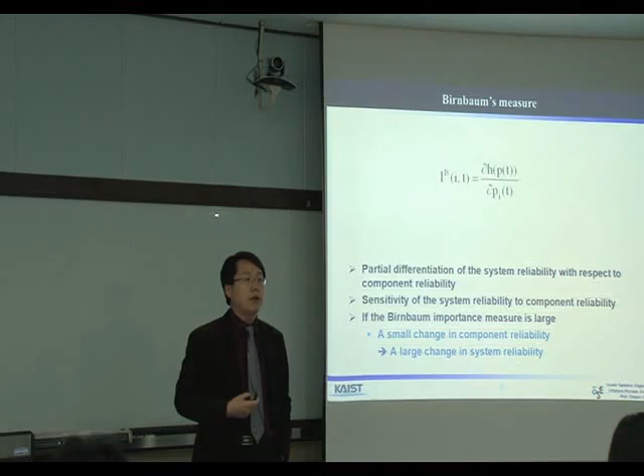The first naturally occurring measure is the Birnbaum measure. It's a partial derivative of the total system reliability with respect to the component reliability. An important conclusion of the Birnbaum measure is that the Birnbaum measure of component I is independent of the reliability of the component itself.

Assume that we are working in a systematic society. The Birnbaum measure tells us that if we wanted to improve our contribution to the society, we should improve the reliability of others, not mine. So it is useless to improve your reliability in order to increase your contribution to the society. Believe it or not, that's the implication of the Birnbaum measure.

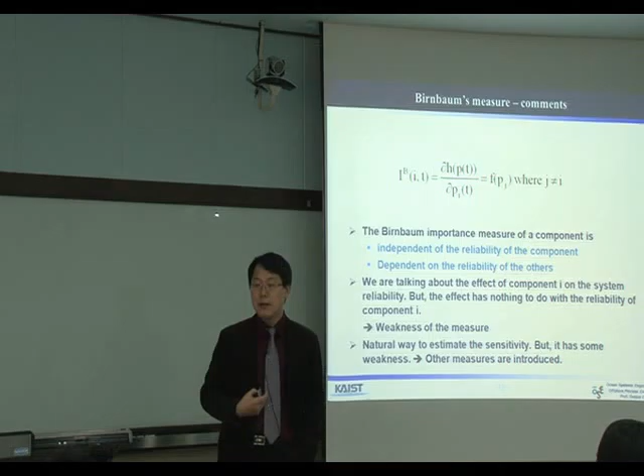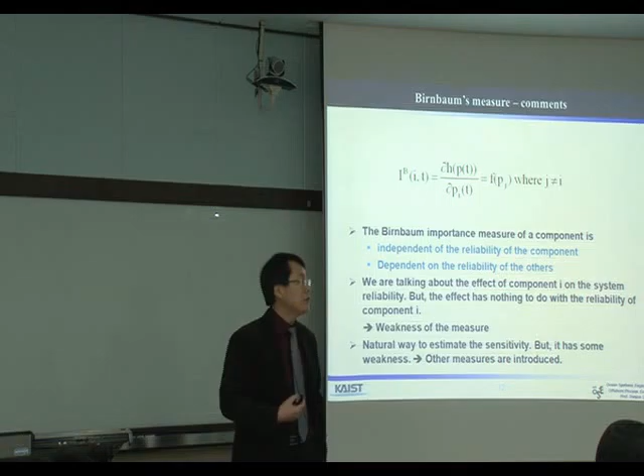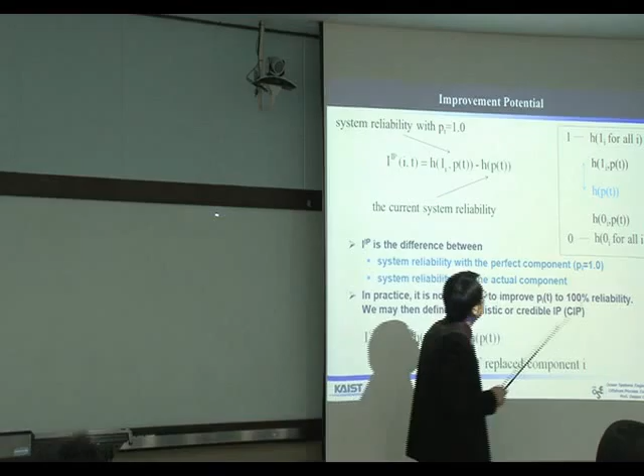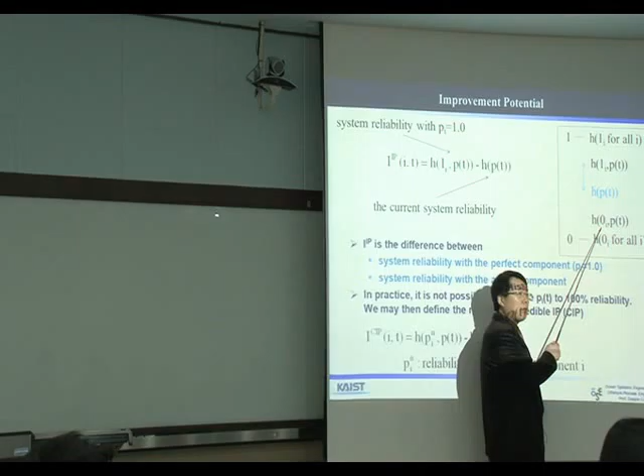Okay, so it seems, even though it is actually correct, that the Birnbaum measure is a little embarrassing, or looks unreasonable. So we introduce other measures. I added this figure. H is the system reliability. H(p(t)) is the current system reliability. H(0_i, p(t)) is the system reliability, assuming that the reliability of component I is 0.

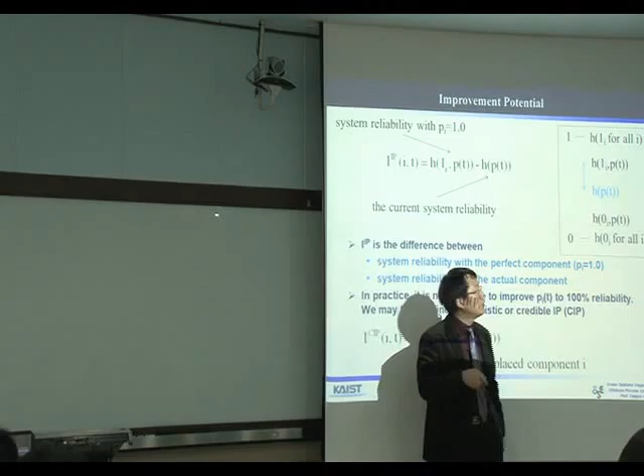Okay? The lowest level is, of course, the system reliability is 0 when all the components have 0 reliability. So this is the bottom. Because the reliability of all the components is 0, the system reliability should be 0. The maximum value of system reliability is, of course, 1. This can be achieved if and only if the reliability of all the components is 1. This is a kind of imaginary system. No system can have the reliability of 1 at any time. The reliability should decrease with time.

This is another kind of imaginary ideal system. The reliability of component I is 1. So this reliability should be greater than the real system reliability, because the reliability of component I is equal to 1. This reliability should be less than the current system reliability, because component I has 0 reliability. So this is the level of the system reliability depending on the component reliability.

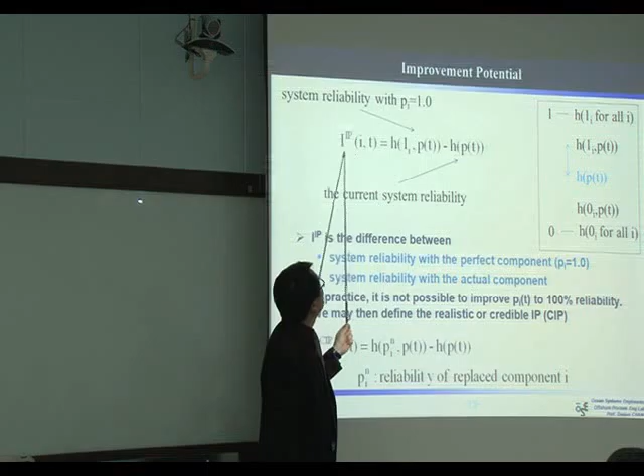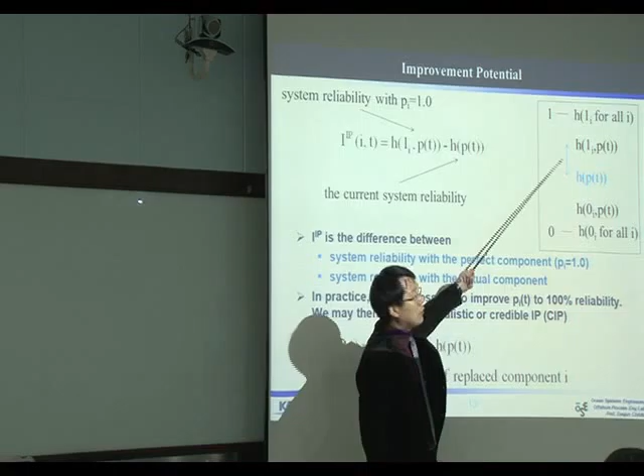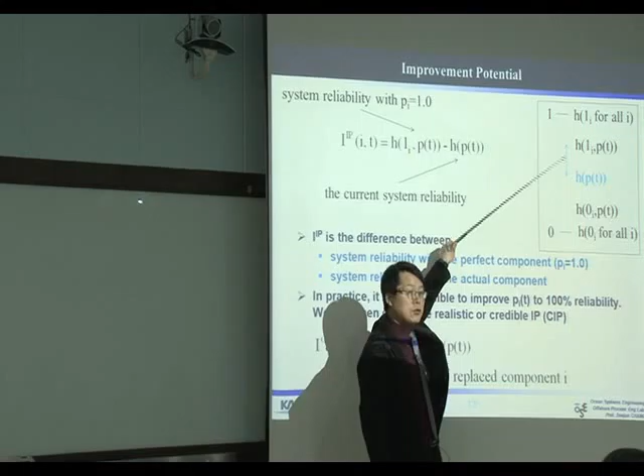Improvement potential is H(1_i, p(t)) minus H(p(t)). Mathematically it is confusing, but take a look at this figure. This is just the difference between two reliabilities. This is the ideal reliability, assuming that component I has reliability of 1. Component I is perfect. So now you can understand why it is called improvement potential. It is the potential by which the current system is improved if the current system has a component I which is perfect.

In practice, it is not possible to have a perfect component. Any component, any system has reliability that decreases with time. So sometimes we introduce a parameter for actually achievable reliability. So this is where p_i^n is the reliability of the replaced or improved component. Any question?

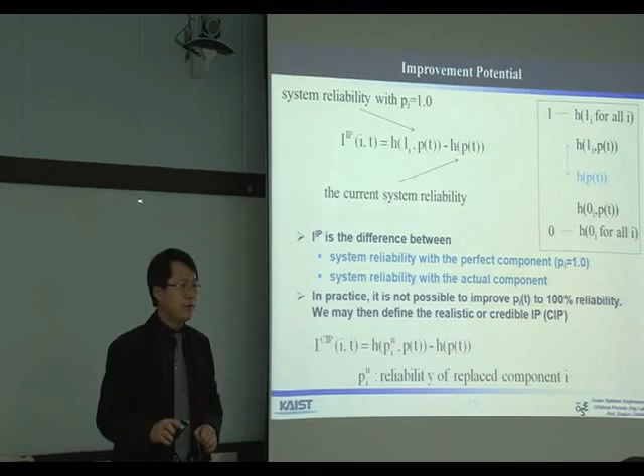Good. Second is about risk achievement. What is risk? Risk is frequency times consequence. In this case, risk is regarded as the unreliability. Unreliability is just 1 minus reliability. Remember that reliability is probability, a number between 0 and 1. Reliability is the probability that the system can fulfill its function at a given condition. So unreliability is the probability of failure. That's the definition of unreliability.

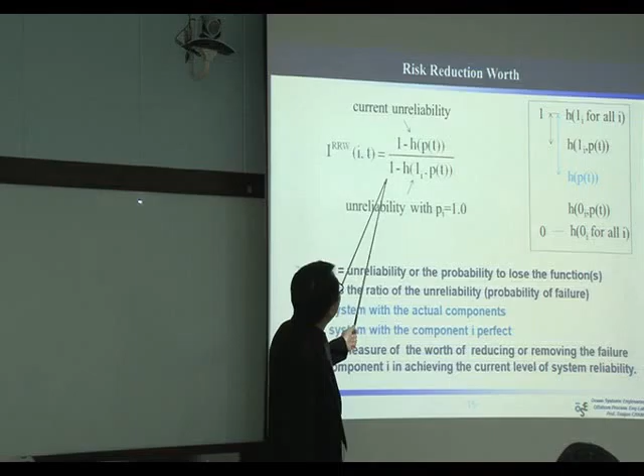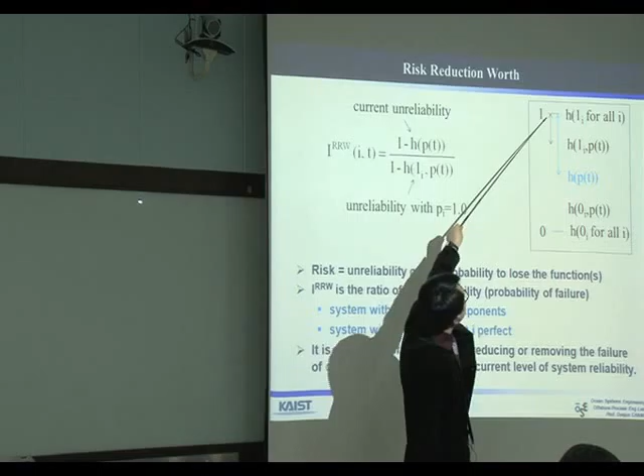This is the risk reduction worth. This is the unreliability of the system with a perfect component I. This is 1 minus H(1_i, p). Is this okay? And this is the current, actual unreliability of the current system. So it's the ratio of unreliability of the system with the actual component divided by the system with a perfect component I. So what does it measure? Reducing or removing the failure of component I in achieving the current level of system reliability. Can you understand this meaning? Reducing or removing component I.

Okay, that's enough. Actually, this is most important. So you'd better give 10 or 20 minutes to understand the physical meaning of this equation. Anyway, the Birnbaum measure and this measure, criticality importance, are the two most important component measures. First, Birnbaum. Second is the criticality importance.

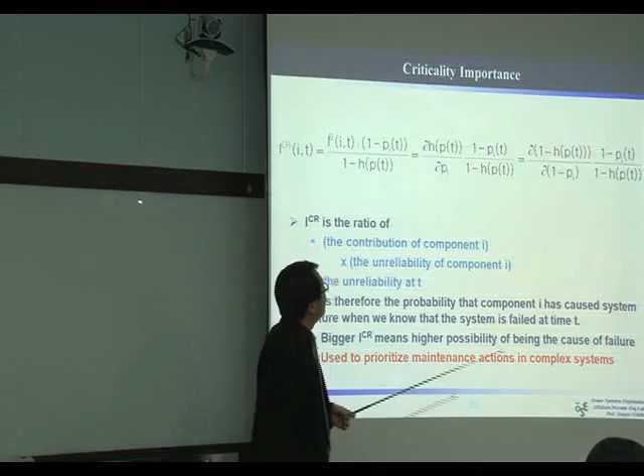So 1 minus h(p) is the probability that the system is not functioning at time t, or the system failed at time t. So it is the probability that component I has caused the system failure under the condition that the system is failed right at time t. I guess you are a little confused, but you'd better give 10 or 20 minutes to digest this concept.

The important implication of this measure is we can prioritize the maintenance action. If a component I has the highest ICR, that means component I has the highest probability of causing the failure of the total system. That means we should give our first maintenance action to component I. So we can optimize the system reliability with these kinds of tools.

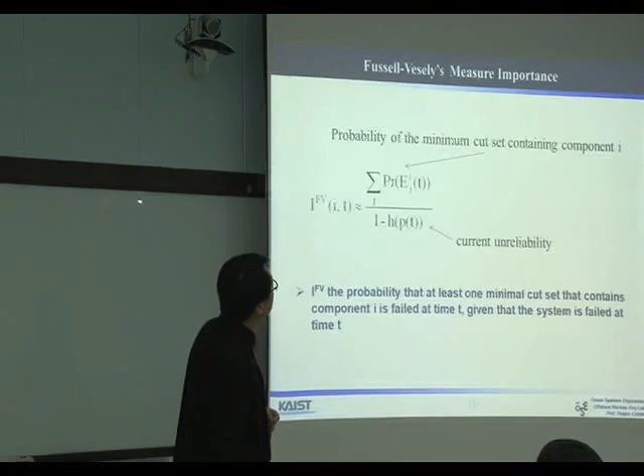Returning to our original question: which is the most important component in the system in terms of reliability? We introduced several importance measures to answer the question. The most important measure is Birnbaum, and you should remember another measure, criticality importance. There is another measure, Fussell-Vesely. So you can read the material again. But let me give you another question. Can we optimize the system design with the component importance measure?

We have a system, okay? Our system has the reliability of h(p). After estimating the system reliability, we know that our system reliability is less than the target value. For example, our system reliability is 95%, and the target value is 98%. So we need to improve our system's reliability.

And there are many, many measures. Here we have Birnbaum, criticality importance. There are many, many measures. Then, can we optimize the system reliability? What I mean is, can we improve our system design to achieve the target value if we know the component reliability? That is my question.

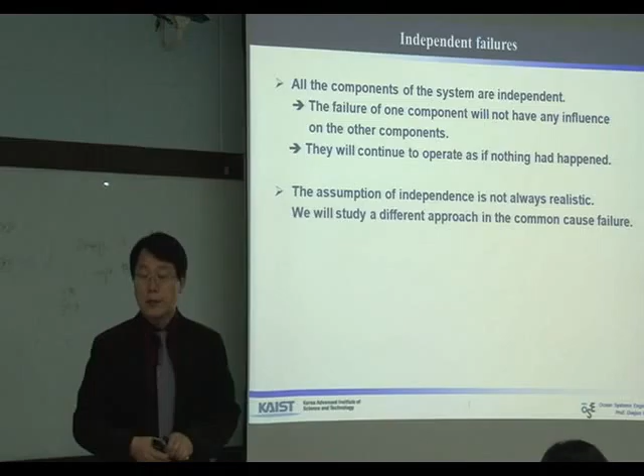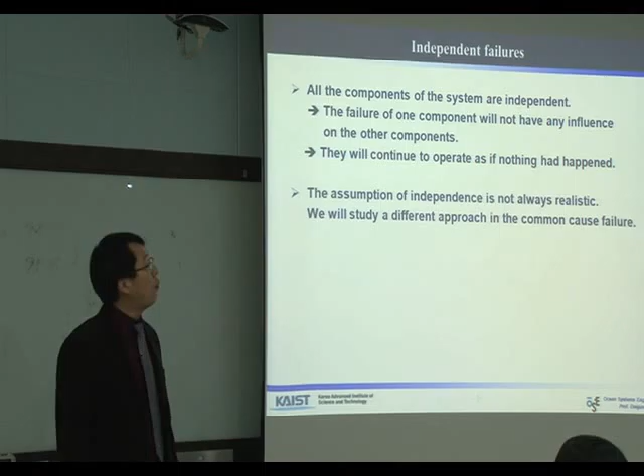Now we will talk about dependent failures. Two days ago, I promised that we will study the system reliability with dependent components. So this is the time for dependent components. There are three causes of dependent failures. First is common cause failure. Second is cascading failure. Third is negative dependence. So let's visit one by one.

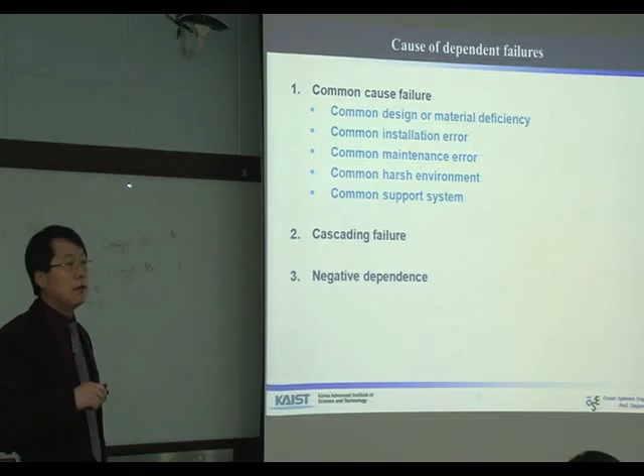What is common cause? As the name implies, the failure that can be caused by a common cause: common design defect, material deficiency, installation error, maintenance error, harsh environment, support system. These kinds of things are the causes of common cause failure. Common design fault, you can understand.

Material deficiency: we have two pumps. The impellers of two pumps are manufactured by one manufacturer, and the manufacturer may use the same material for the impeller. So if the failure of the pump is caused by bad material for the impeller, we can assume that the second pump will fail sooner or later due to the common cause of material deficiency.

Common installation error. There is a good practice to install some instrument, for example, but if they apply the same installation practice to all the components, and it turns out that there is some mistake in installing a component, we can guess that all the rest of the components should be subject to the same fault.

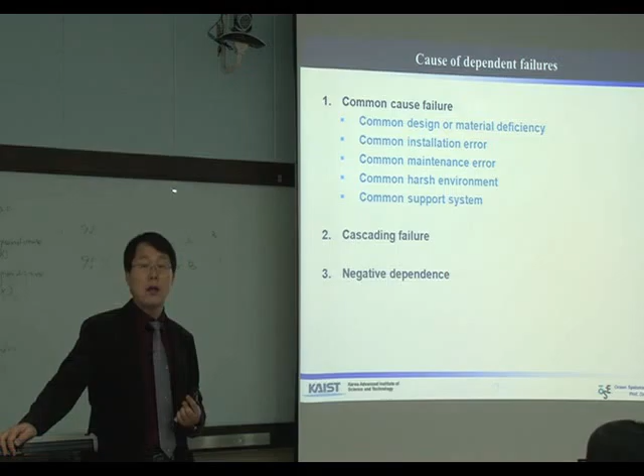When we define the reliability of this electric bulb, the electric bulb should be installed indoors. If it is installed outdoors, the reliability cannot be guaranteed because the operating condition is changed. So reliability is a function of environment, operating condition. So if we have a harsh environment around our system, it is natural to assume that all the components may be subject to similar environmental load, and they can fail if one of them fails. This is the common cause failure.

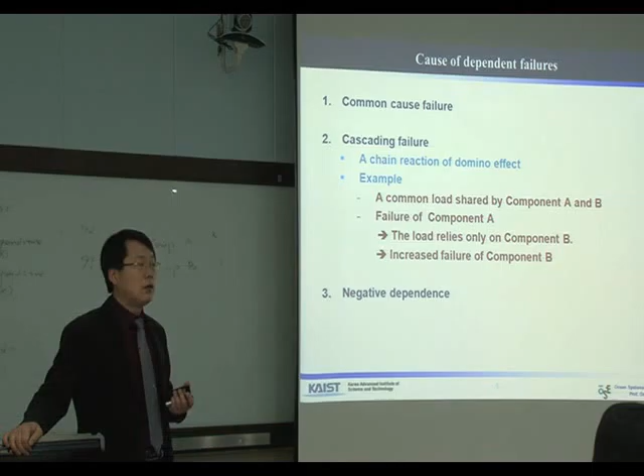Second, cascading failure is a domino effect, chain reaction. Assume that we have two components, identical components. A common load is shared by the two components, component A and component B. For example, we have a pump here. These two pumps are supposed to deliver 100 kilograms per hour, and the load of each is just 50 kilograms per hour.

One of them fails, so the operator wants to send as much water as possible using pump A. So pump A is overworked. I mean, the flow rate is increased from 50 to 70. Then pump A is subject to increased load. That means the environment, the operating condition, is changed. So we can guess that component A will have a higher failure rate at this increased flow rate. This is the type of cascading failure. That means, what is cascade?

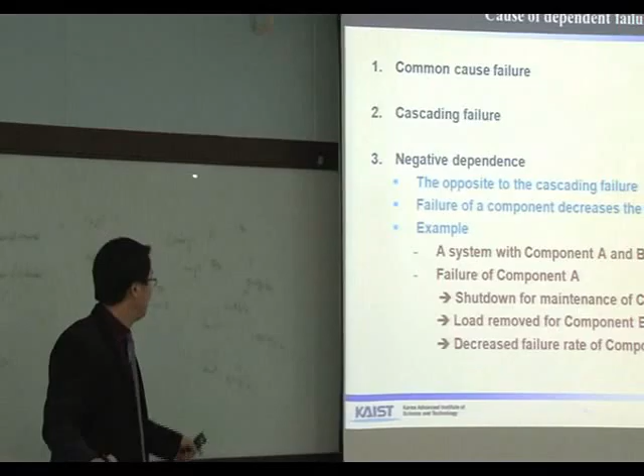Negative dependence is the other side of the story. Now, pump B is failed, and the operator recognized the cascade failure mechanism. So, what they do is to stop the whole system and fix pump B. That means pump A is not operating, so the load to pump A is decreased. So due to the failure of the neighboring component, pump A's failure rate can be decreased. This type of failure mechanism is called negative dependence.

If we know the functional connection, the system configuration, causes 2 and 3 can be modeled. But we should do something about the first type of failure. So that is the beta factor model. So beta factor model is for the common cause failure. These type 2 and type 3s are modeled using the change of system configuration. Okay, we can change the RBD or FTA, but the first type of failure, common cause failure, is hard to define. So we introduced the beta factor model.

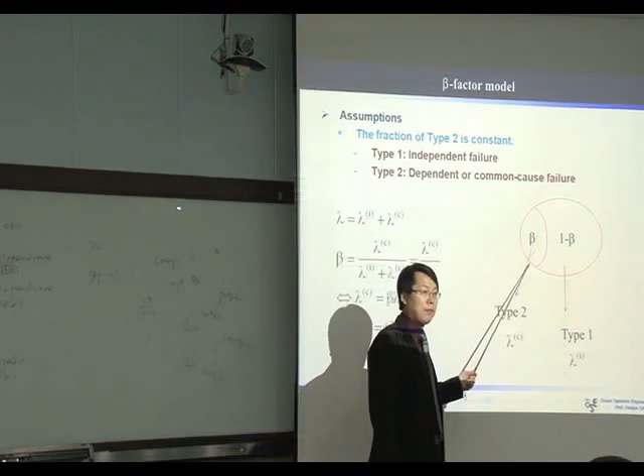Each component has two types of failure. Type 1 is independent failure. Type 2 is common cause failure. The fraction of type 2 is constant with respect to time. It's hard to understand in sentences, but it is very easy to understand the concept in a graphical way. This is the total failure. There is a common cause failure. The fraction is beta. The rest, 1 minus beta, is the independent failure. Common cause failure, independent failure. This is type 1, this is type 2.

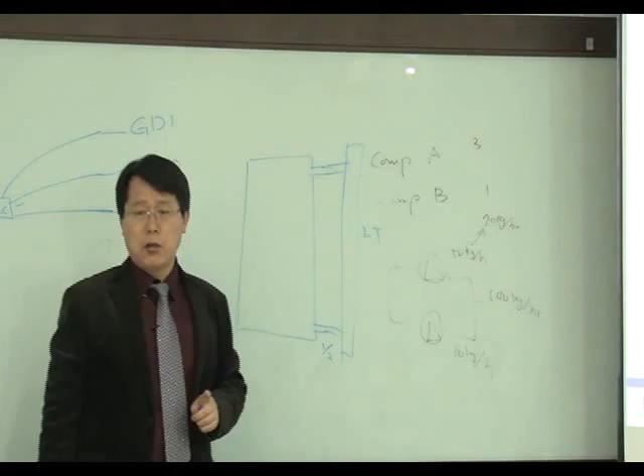But the owner doubts the reliability of this level transmitter. So they request that there should be another redundant level transmitter. So the convenient way is we can have a T line here and install another transmitter here.

Now you can understand. These two level transmitters can be subject to a common cause failure here. Okay? If there is some material that blocks the tubing, even though the level transmitters themselves are working very well, they are subject to a common cause. So avoiding the common cause failure is very important when it comes to safety. Okay?

In a BPCS, basic process control system, this kind of configuration can be acceptable. But the safety system is a kind of final barrier to the safety of operators and environment and to the society. So there are strict requirements about the common cause failure. Sometimes it is called hardware redundancy. Anyway, the term is not important. The important thing is you should satisfy this kind of requirement when you deal with the safety system.

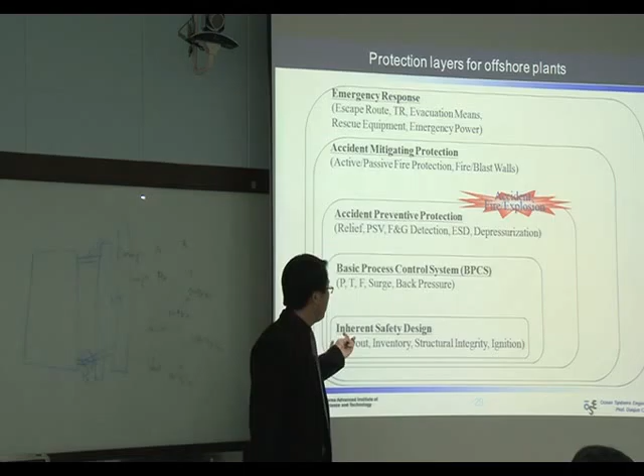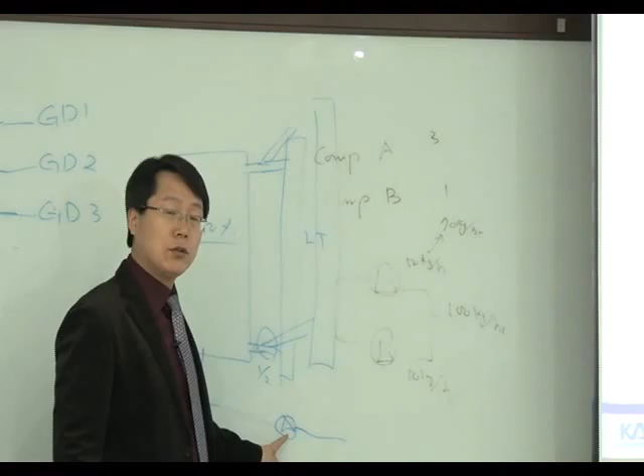Anyway, there is inherent safety design, there is the basic process control system, and we have the safety system. And if we wanted to control the level, we may use some BPCS, like we can control the control valve, or we can control the speed of the pump here. So BPCS tries to control the level of this tank to 50%, and this pump should know the level of this tank.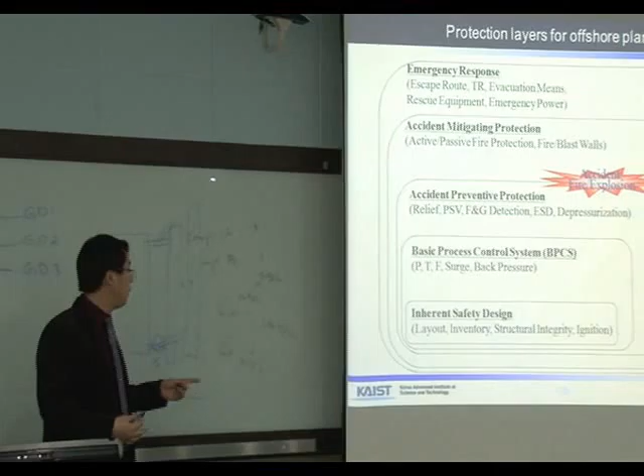When this BPCS fails to control the level of this tank, there should be an accident preventive protection layer. There should be a level detection system, and the system should recognize the failure of the BPCS. So one way to implement the policy is that we have this.

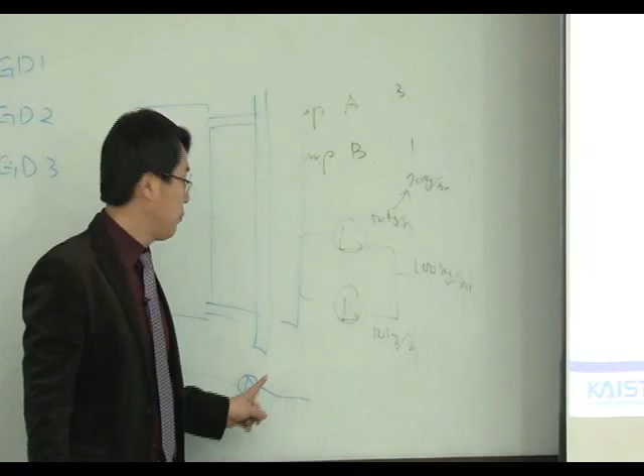We install one level transmitter for BPCS, and we can use this level transmitter for the preventive protection layer. The level can be reported to the control room, and the control room safety PLC can issue an alarm: the level is increasing or the level is decreasing. But the requirement is that the level transmitter should not be shared by BPCS and the safety system.

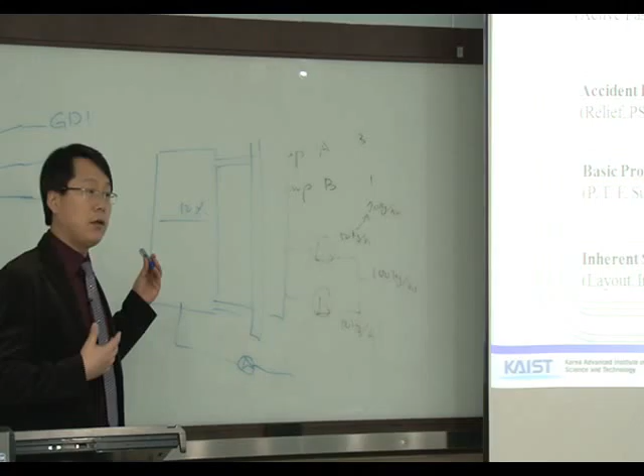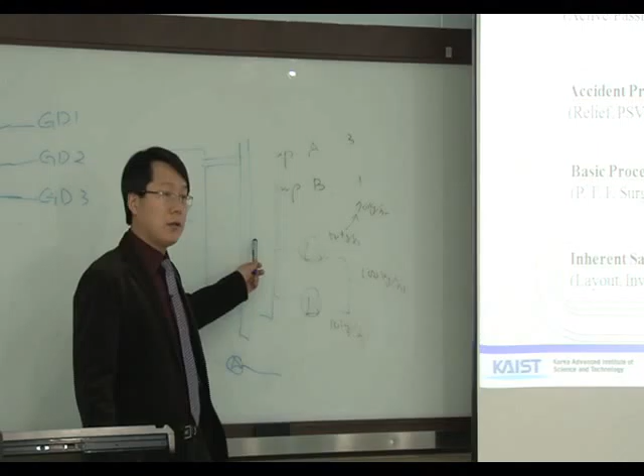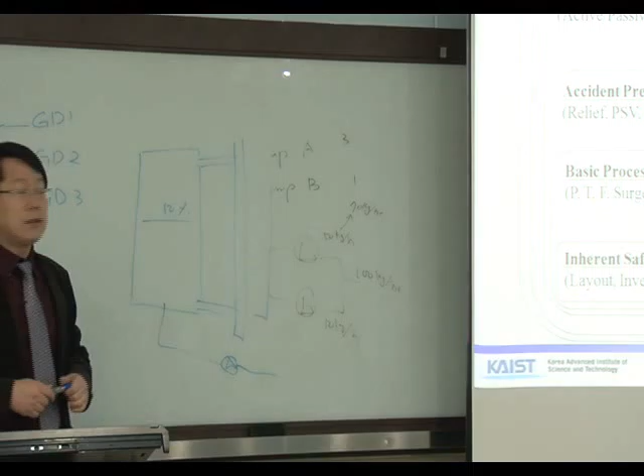It is quite sure that the BPCS can contribute to the total system safety, but the safety engineers are concerned about common cause failure. When BPCS cannot control this level, there is a high possibility that the level transmitter is working properly. Maybe the pump is not working correctly, or some valve is not working properly. But there is also a probability that the level transmitter is not working correctly. So the requirement is that the level alarm system should have a separate level transmitter.

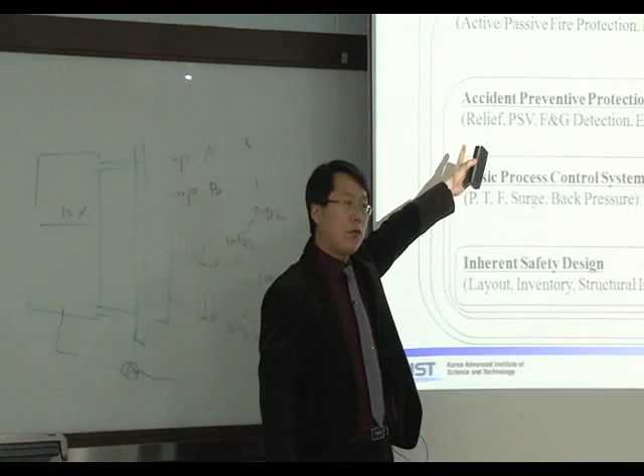So that's why the plant instrumentation is complicated. If you are familiar with ships, ship systems do not have to satisfy plant-level safety. So in ship systems, you usually have one level transmitter. That transmitter is used for BPCS and for the preventive safety system. But in offshore practice, the instrumentation should be separated to avoid common cause failure.

So we will soon learn about the reliability of safety systems. There are several requirements, so you need to wait 2 or 3 weeks to learn that concept. Anyway, common cause failure can appear everywhere, every time. So you should pay attention to avoiding common cause failure in designing your system. Any questions?